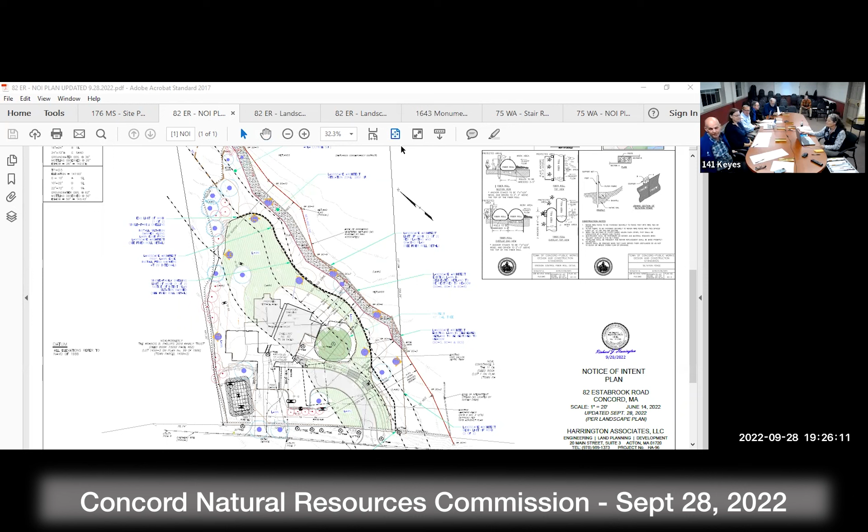We have Kevin, just... yeah. And then of course we did see Kevin's, I think, resume. Thank you, Julie, just a brain cramp here. So, look, thank you for sending that. Looks eminently qualified. Kevin, if you just wanted, I do see that you reconfigured the mitigation area running alongside the wetland and stuff. You just want to touch on that a little bit in terms of reconfiguration and thoughts towards that? Yeah, of course.

When myself, Delia, and my colleague Jessica took a look on site, a few of the changes that were made from the last plan you saw were that we took some field measurements to understand where there was existing turf in the wetland, and where there was existing forbs, non-turf, desirable species, that were on the house side of the wetland line.

We took field measurements to really narrow in on what we were doing. At that time we thought, for purposes of monitoring, maintenance, and execution of a mitigation area, to ensure thorough success of species, let's just mirror the outline of the existing wetland line. So that was really the layout of the plan changes, and then we added a bit more narrative to discuss how this is going to be done.

So the mitigation area will stretch from the wetland line—in certain areas it shifts, but it'll be roughly from the wetland line, except where you see wetland flag BC 11 through BC 8, it diverges, just because that was existing forbs, mostly goldenrod and maybe some asters. So this way the mitigation area runs along the wetland line and basically just matches it.

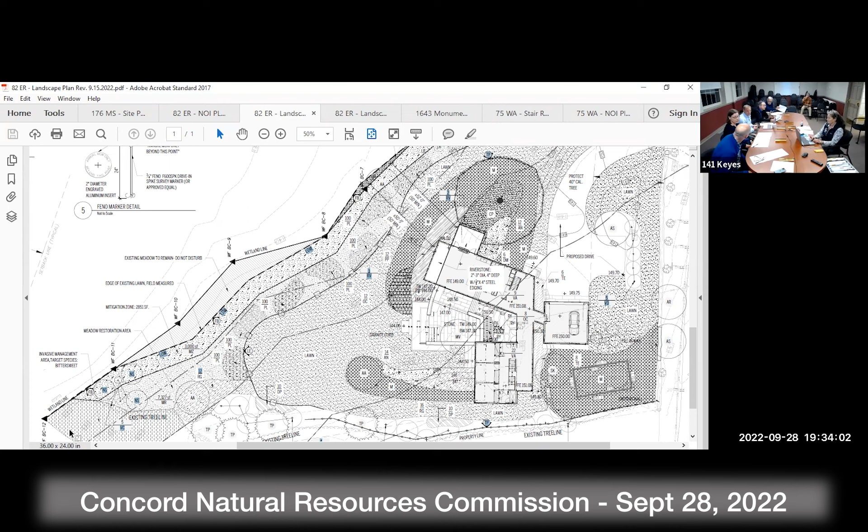Comments from the commission? All right, seems good. Seems like a nice improvement. Any comments from the public in regard to this application? Seeing none, all right, so I believe we have an order of conditions.

I've got 1609, this is 1608. No, I think I can do this. Let's see, it says 1609, right? Yeah, 1609. So I move that we issue a special order of conditions with a finding under A, and we issue standard conditions numbers 1 through 20 and special conditions numbers 21 through 58. This is for DEP filing 1371609 at 82 Estabrook Road.

Second. Thank you, Sarah. We'll take the vote. Bill? Aye. Nick? Aye. Gary? Aye. Sarah? Aye. And I am an aye as well. Good luck with the project. Thank you. Thank you so much. Thank you very much.

All right, the next application. Let's see, it is DEP file number 137-1608 for an NOI at 1643 Monument Street.

And we have, good evening, Ben and David. Yep, coming on. Hello, good evening, how are you? I am well, thanks, how's everybody tonight?

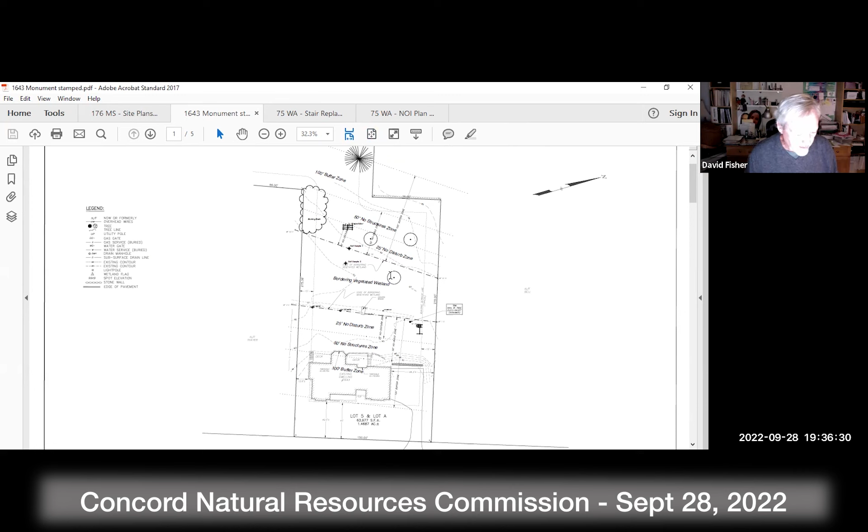So what we did, the items from last meeting was that you requested a letter of support from the neighbors. To be blunt, they said no. So one of the changes in the plans is that we are now showing the rain garden totally on the Trafton's property. Yes, that's it there, so it's a little bit smaller.

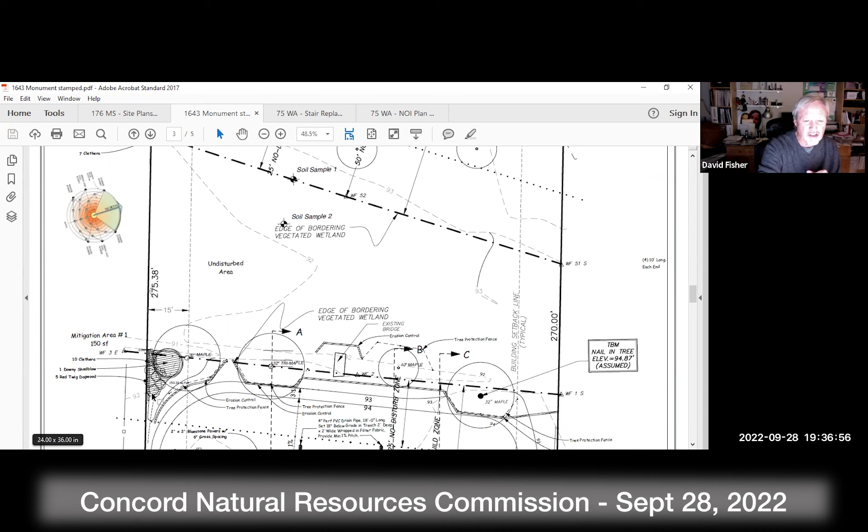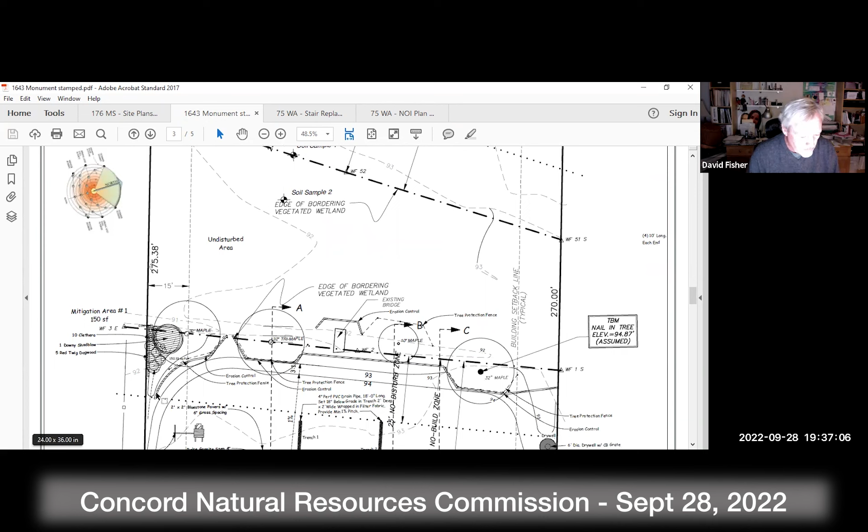And we've changed just a tiny bit the location of the erosion control so we can get that built properly. And another issue was a detail for the bridge, which is on the detail sheet.

And then I'll go through the 4 items and we can talk about them specifically if you want. We needed to add information on the Euonymus alatus, the burning bush, to be removed, and square footage for mitigation, compensation, and methods for that. That is now all on the plans. And then we needed to provide a calculation of the square footage of impacts to be mitigated.

And we completed that at about 1 o'clock this afternoon, Delia, maybe something like that. And then the last one was updating the waiver requests, and you have copies of those. So if you want to discuss any of the items in particular, happy to do that.

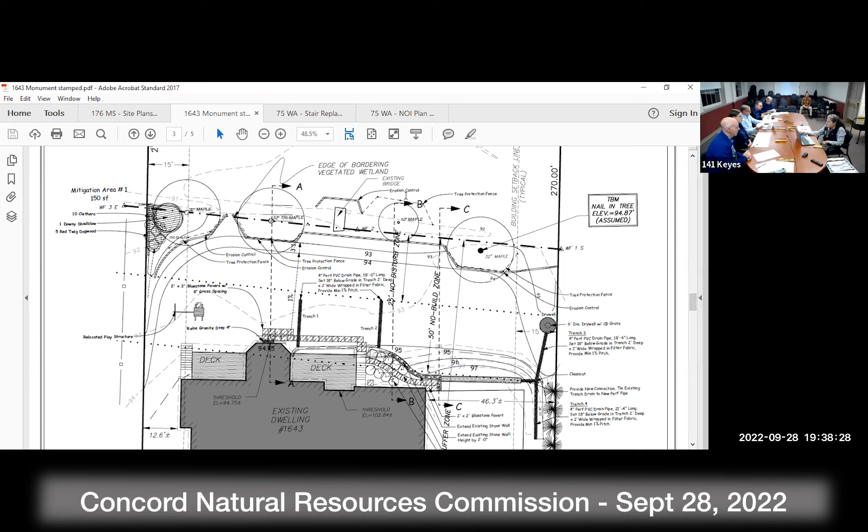Thank you, David. I took a look at the plans. It looks like everything was covered from our last meeting, so I don't really have any questions necessarily. Any other commissioners? No, okay. Does the public have any comments regarding this application? Not seeing any. Okay, I think with that, we have our order of conditions.

So I would move that we close and issue an order of conditions for 1643 Monument Street, DEP file number 137-1608, with standard conditions 1 through 20, findings A through C, and then special conditions 21 through 57.

Thank you, and we'll take the vote. Bill? Aye. Nick? Aye. Gary? Aye. Sarah? Aye. And I am an aye as well.

Thank you, guys, good luck with the project. Thank you very much. Good night, have a good evening all.

All right, we'll move on to our new application this evening. It's a notice of intent, 75 White Avenue, DEP file 137-1616.

And let's see, who will be discussing that with us this evening? Is it John? Oh John, how are you? In person, come on up, please, help yourself. Excellent, thank you, thank you very much.

Busy night for something you guys had indicated you might get out real quick, right? The roll of the dice. Well, keep it up, keep it up. Right now, very good, yeah. Don't jinx us, that's right.

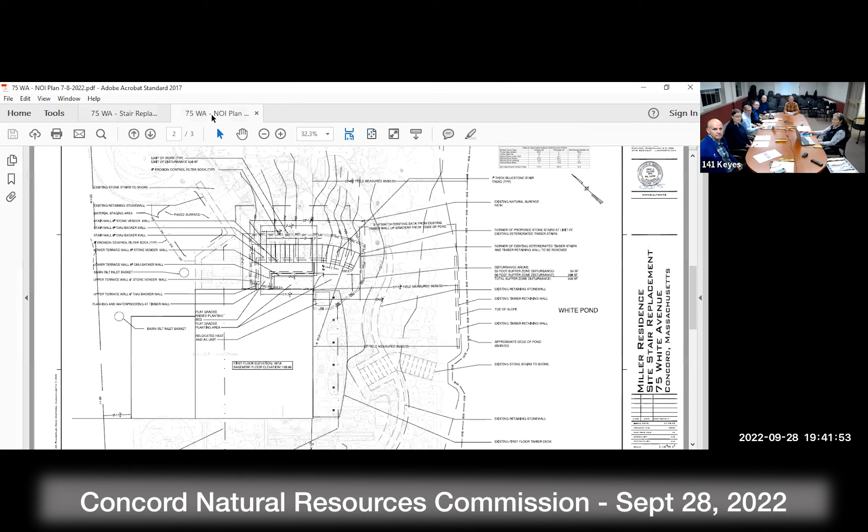Do you want to see that existing stuff? We can switch the plan out. Well, there we go, right there. Zoom right in, perfect. I wish I had a pointer. Can I move? My pointer doesn't work on a TV screen, but mine does—there you go, it'll probably help.

The existing house, let's see—I apologize for being in the way. The existing house outline is right here. There's a deck that comes out. The first floor is about 9 feet above grade down here, that's where the deck is. There's a second story bedroom and a sitting area.

Down over here are the existing steps. They come down and end right there at the timber steps. There's a landing right here, and the top of the stairs is right here. There's an existing timber retaining wall, almost 8 feet high right there.

That's the part that really has me worried, because I know it's going to go, hopefully not too soon. There's a timber wall on this side of the stairs, and grade on that side. It's stepping down, with rot at the bottom of the stairs in multiple locations. The wall has it at different heights along its length, and it's got to go—it's really not stable. That's probably the best way to describe it. So it needs to change.

What we want to do—and this is probably the most important part of our conversation from the engineer's perspective—is that this wall is 8 feet high, and in order to remove it, there would be an 8-foot wall of exposed soil. Over here, let me get my bearings: this is a stone wall, one of the ones I mentioned. This is a landing area, a plaza. The door in is right here at that same level as this, 9 feet above roughly where the deck is. So in order to build a new wall here, we'd have to take this one down.

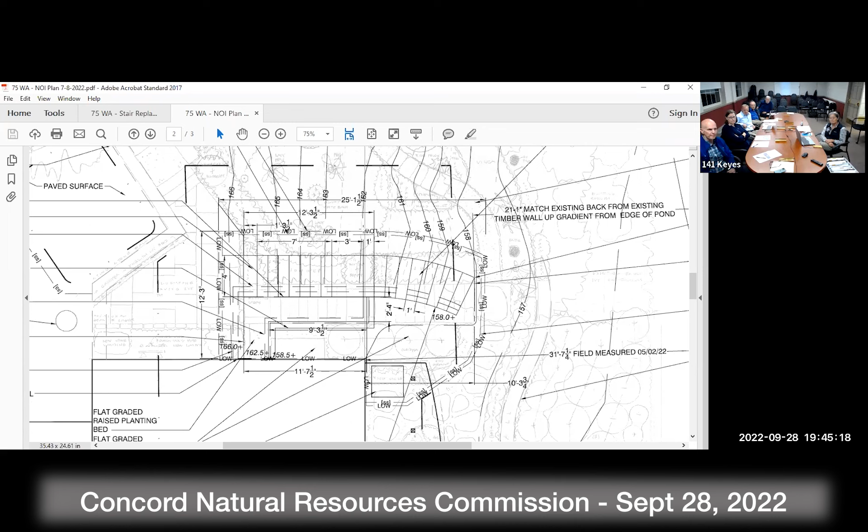The idea is to replicate what we have, with a little curve added. There's a walkway that follows the trail—not really a trail, not that wide, because I don't think they really use it. There's a big stone at the bottom, and more stones down there. Our new stair will end in line with the old stair, 21 feet 1 inch from that retaining wall down by the pond I mentioned. The pond is beyond that, 2 to 3 feet in some places, but I use that as the reference point because it's solid today.

So what we want to do is come down with the same idea. We have a terrace, a bottom section of stairs, a top section of stairs, and these walls right here. This will be a planter at this level, all planted. The stairs end - the existing stairs are right here.

We're moving this over about 2 feet 4 inches to make that work, and it's going to facilitate all the construction. It's a tough build because the grade change from the wall over here down to there doesn't allow vehicles. Can't bring equipment down there to do it, so most of it's going to be handwork.

We've got CMU walls we're going to build as backers for the stone walls - we'll see the stone. What we'll do is lower the blocks over the wall. The whole pallet can go down there now, we can drop that in. Probably a small lift would allow us to do that. But the big picture is that we need to build this to keep this stable.

And this becomes a landscape element. Right now, this ground cover over here, we'll use what we can, probably put it over here, and eventually whatever grows there will become what's natural.

I don't know if you've been to the site. You've been to the site. So John, can you just simply indicate the approximate location of the 25-foot setback, just roughly? Right here, goes up here, right there - that line right there. So it's this line here.

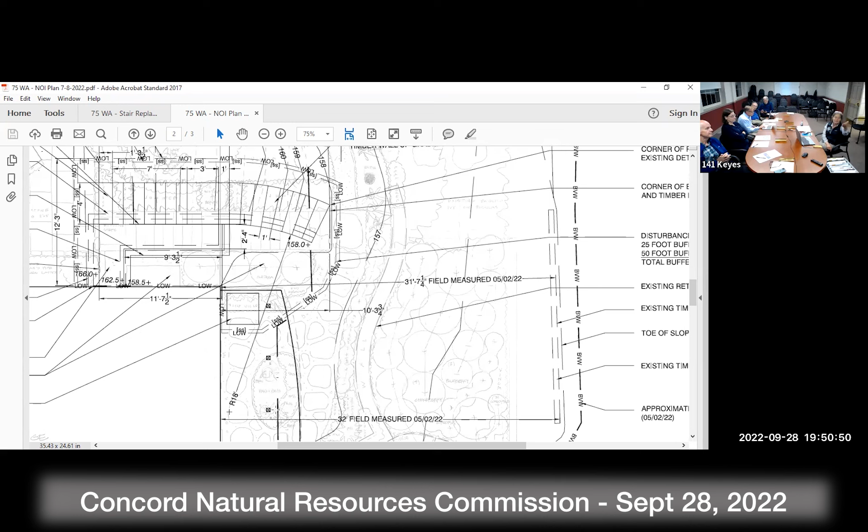We generally look to see about 5 foot on center for shrubs. If it's a low bush blueberry, then it's more like 1 or 2 foot on center because they're just a lot smaller. We'll have to figure out what we want to put in there. It's gonna still be like a crevice almost. Right now it's really tight, about 3 feet. When we open it up, more stuff will be able to grow there anyway.

One thing they're gonna do eventually is move the AC heating unit over here, and they're gonna move that over here and put a heat pump. That's probably another exercise for them in the future.

So do you show that? I thought you showed that on the plan. Is that the relocate? Yeah, I did, relocated heat, it's gonna be much smaller than that, that would go under the deck, in an area that's already disturbed. But we have to work around what's here now.

And John, on that retaining wall that you're proposing, the low retaining wall, will that need a building permit? It will need a building permit if it's 4 feet and beyond. So when we decide who they're gonna hire to do that, then we'll get all that filed and we'd ask for a stamp plan, of course. We'll want that. So, is there anything else?

The big thing is the access kind of drives this, and the concern about that fill that's behind that wall that's fallen. So where do you plan your stockpiling location, staging? Can we slide this plan that way? Magically... watch. Like that, it worked, and come down a little bit. Other way, right here. Right in here, there you go. We've got a staging area right in here, and we've got a silt sock around that pavement.

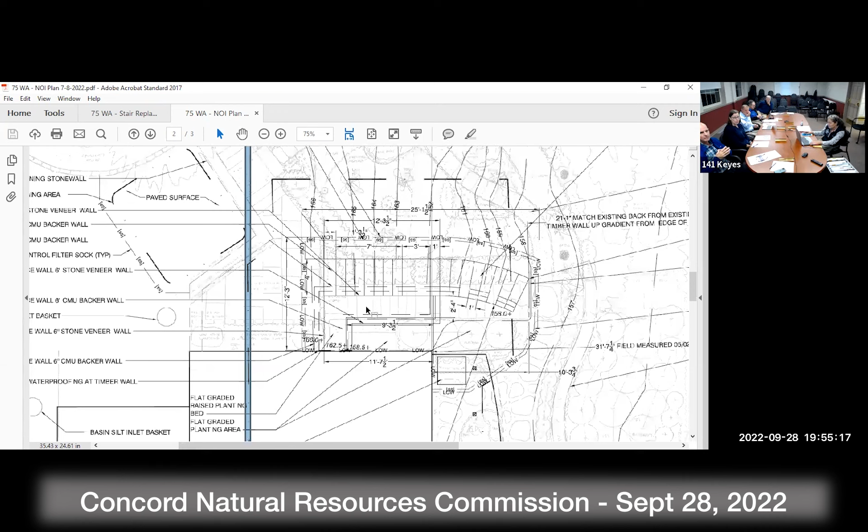Let's see, there was one other thing - Natural Heritage stuff, I filed early with that. We got an initial response letter, said you gotta send them the full NOI. So I sent them the full NOI and got an email back. I was surprised it was just an email from them - I expected something more official, usually a letter that they copy the town on. But they said it was exempt. So you're good - no blood wort on the property.

So you have this estimated BVW line down here, and you have a 25-foot that stops here. That should continue across, and then add the 50-foot line.

I think you made it all blue, so let me go back - I can see the dots here. That's right, oh there, yeah, somehow it's blue. Is that it here? It's right here, that's it. Okay, it comes straight, it's got a little bit of a bend, and it heads off there.

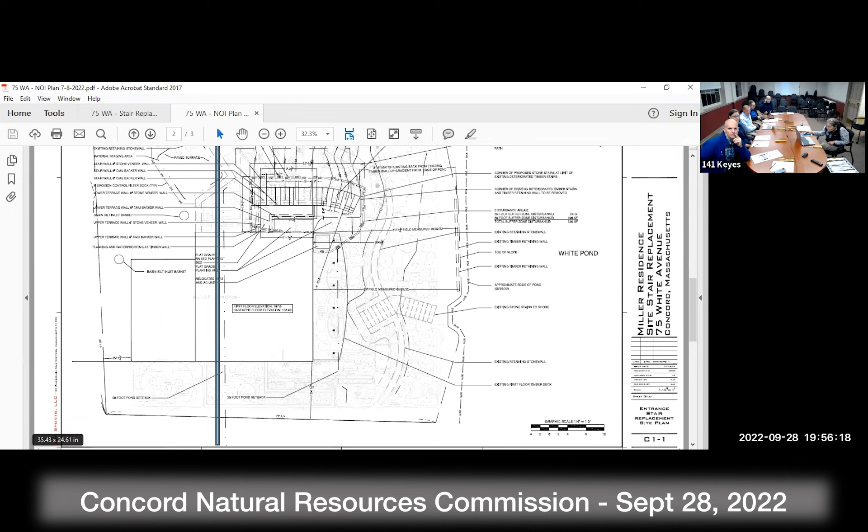John, if you could just on the 25, as you extend that, call those out more so we can see them. Okay, yes, you know what, so I see them now. If you go to the color drawing, you see it really well.

Okay, for lack of a better term, this one just stops - the 25 just stops. I don't see it extending beyond here. It goes at an angle, and here it turns at an angle, bends over here, comes around.

Why would it bend if the BVW is staying? I know, the BVW isn't - look at the BVW, it's also bending at an angle. And this is bending too. That's a good question - it's an odd offset because this guy bends, the 25 bends. Well, we'll take care of that. Or wouldn't it be bending?

It's if the bend is in the wrong place, the bending would be directly opposite. The bending's from this little piece here - this kills it. That jog, would it be up? No, it should come down. The jog creates... I mean, I could make it a radius, but that isn't what it would be, just a straight line.

So basically what I had was that line, and I just filled it in. I could have made it a radius here, because it would be a rounding from here to here, and I just made it simple. But it should be more of an arc so that every point is 25.

Right, yeah, that's easy. You can do that. Okay, great. So a little bit of a to-do, if you will.

For the next meeting, revised materials are due by Friday noon. So either continue with that if you think there's not a lot of changes - this Friday - or if you want to go to the 11-2 meeting, which would be November 2nd. The deadline for November 2nd, as we learned, is October 21st. So it's either this Friday or October 21st.

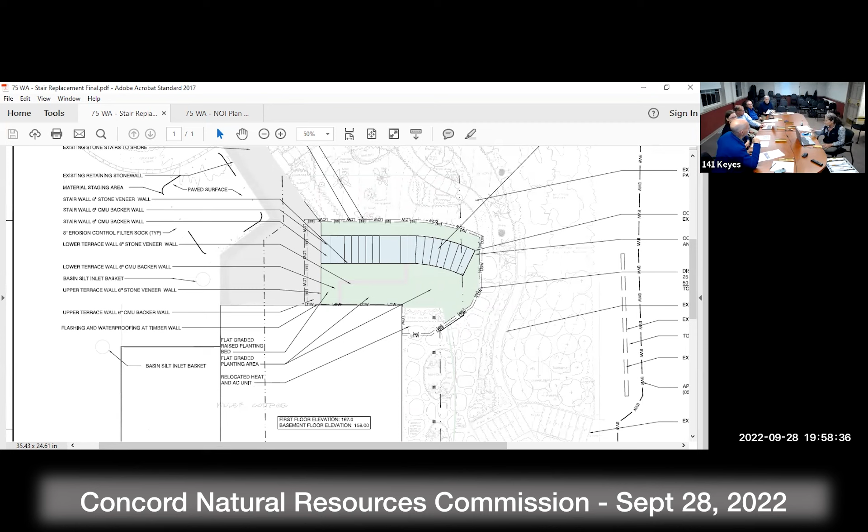Okay, let me just ask if there's any public comment regarding 75 White Ave. Oh, God, did I make another typo on this? No, I'm sure it was me. Duly noted.

Yeah, okay, I'm reading out the thumbnail. Sorry, okay, no problem. No public comments that I see.